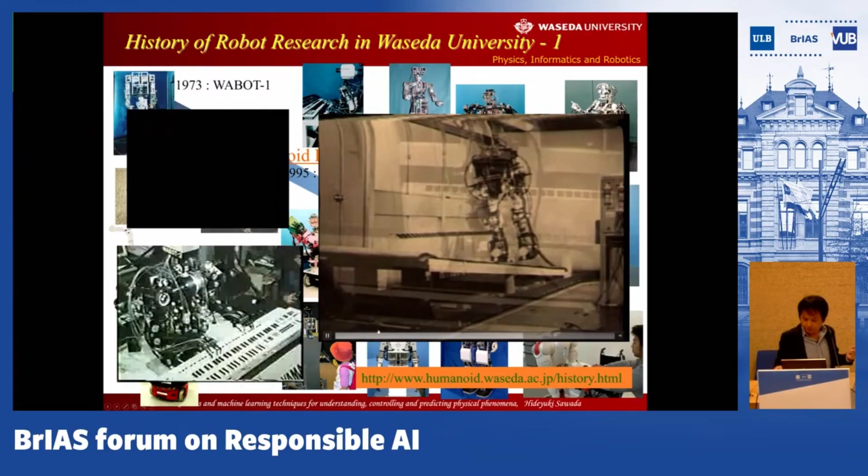Yes, this is the first robot, 50 years ago. The first robot we developed is a static walking robot. It means that in each small motion, the stability is calculated, so in any situation the robot was kept stable under control. But static walking is different from human walking, because we walk dynamically, right? We cannot stop in the middle of the motion, or we fall down. But the first robot was realized by static motion, one by one.

At that time, the robot took about 30 seconds for one step, because we needed calculation one by one. And the first robot used a hydraulic system, not electric motors. At that time, there was no such motor. The second one, developed 10 years after that, realized dynamic walking, like this one, a walking motion like a human, and it can also climb up steps and some slopes, more than 40 years ago.

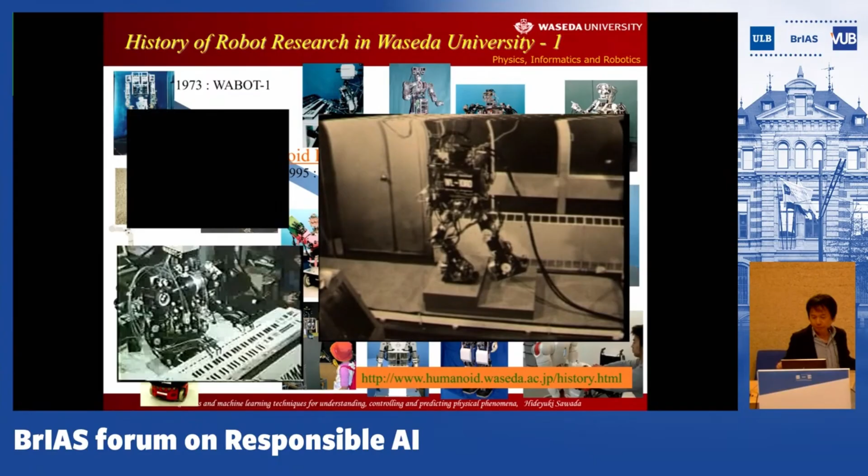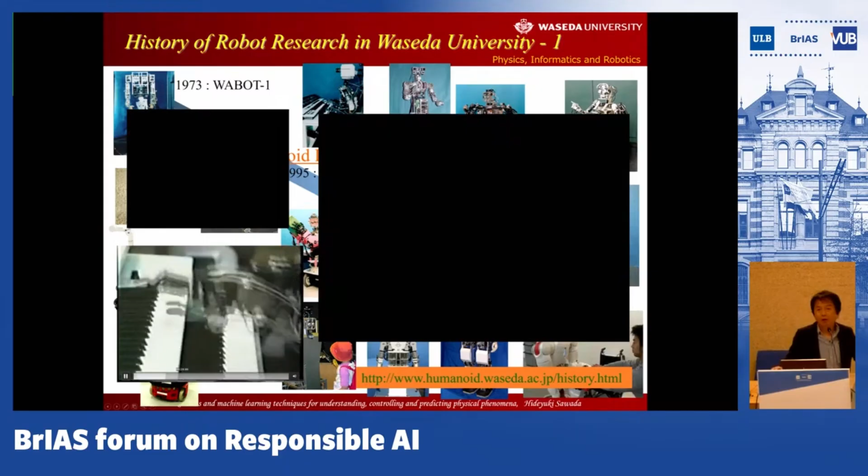After that, we developed a piano-playing robot using maybe 30 or more DC motors for the control of the fingers and the feet for playing keyboards. And in the Tsukuba Expo in 1985, this robot played together with a real orchestra, like this one. It was really a sensational work realized by a robot 40 years ago.

Yes, this is an old video, but this is the history. Then in 2000, we started another robotic research institute called Future Robotics Organization, and we have developed further robots, not only just to walk or move, but to handle objects or to collaborate and communicate, including touch with humans.

And this is a video of a robot developed about 10 years ago, around 2010, and it can dexterously manipulate small stuff. It is a chopstick... no, it is not a chopstick, but a straw. It can put it in a cup and give it to another person, right?

And also, this robot is able to break an egg, maybe this one, like this. Yes, dexterity. Like this, maybe like this, okay. By controlling the force given to the egg, the robot is able to softly grasp the egg, and also it gives some force to break it on a pan.

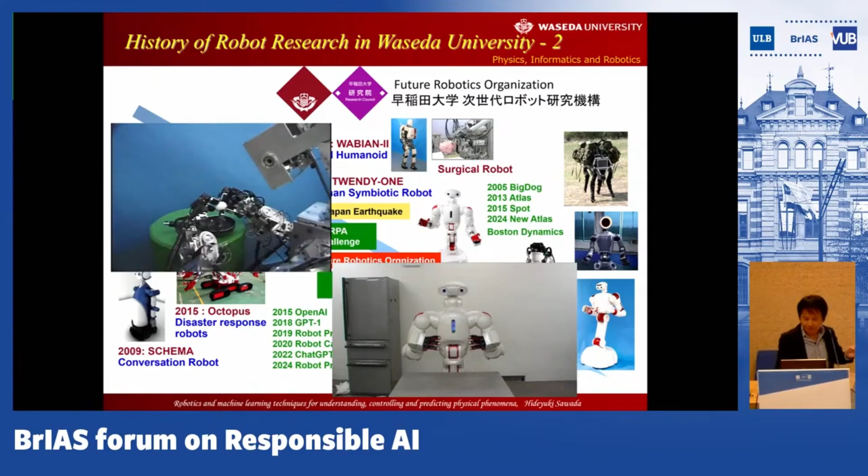Okay, right? And yes, the walking robot. As you know, these days there are a bunch of robots introduced by the U.S., of course Japan and also China. But as I introduced, the first biped robot was developed by Waseda University, and these days different kinds of robots are developed. But we, the Waseda group, do not work on biped robots anymore because

this is a typical structure of the biped robot. The biped robot is expressed by the physical control model of an inverted pendulum, right? All the motors are settled in the inverted pendulum; it is much more complex, but it can be modeled like this. By modeling all the motors and the geometrical structures of the robot, we can construct a control system. Once we get a control model, it is not difficult to control it.

The problem these days is the power of the motor to generate force. Have you ever thought of how much force is given when you walk? For example, for a 60 kilogram person, how much force is applied to the knee? Have you considered that? About 4 to 5 times your weight. This means that for a 60 kilogram person, when he walks, about 200 kilograms of force is applied to the knee or the foot.

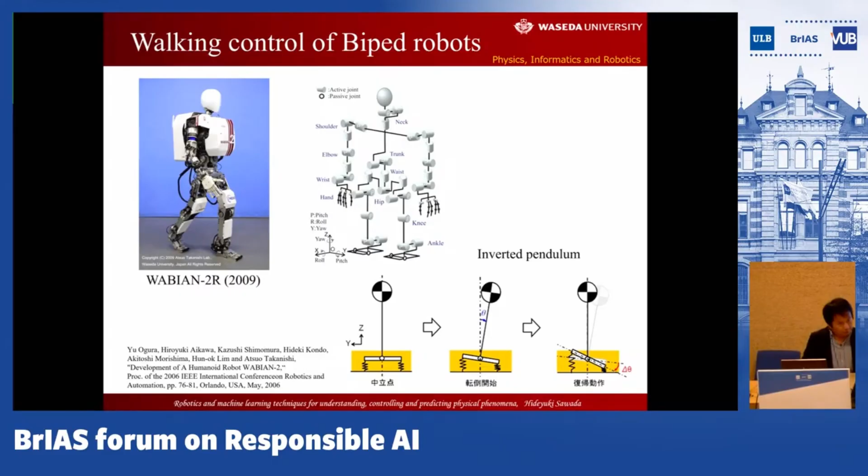Waseda University has been engaged in the development of such robots so far. And these days, we are much more interested in flexible robots able to have good communication with humans, for supporting or having real-time interaction with a human, like handing some object to a person, working together, or something more.

As you know, robots were first introduced for manufacturing in factories, in the secondary sector of industries. Then such robotic technologies were introduced to the primary sector, such as agricultural robots or agricultural worker supporting robots. And these days, such robots have been further developed in the tertiary sector as service robots to support or assist humans.

And this is another result introduced by graduates of Waseda University. It is a project called Gundam Global Challenge. Gundam is a very famous robot, first animated in Japan in the 1970s, almost 50 years ago, and all Japanese people know it. About 10 years ago, the animation company and some companies got together, including alumni of Waseda University, to develop a real-size Gundam robot.

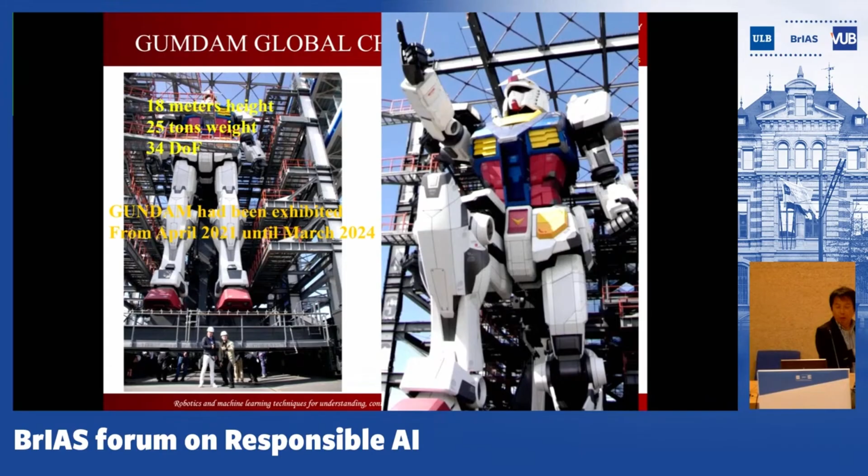Okay, here. And currently, this robot is exhibited, not moving, but in a still pose like this, in the Osaka Expo. So if you go there, you can see the real-size Gundam, 18 meters in height, but it won't move anymore. Yeah, like this. In a pavilion, they exhibit the Gundam.

Yes, and then in the pavilion they present a metaverse exhibition, so that you can observe the Gundam in 3D or something. Yeah, and outside they exhibit this Gundam. Okay. Yeah, currently until maybe September of this year, I don't know. Yes, maybe 3-4 months from April, this month. No, last month.

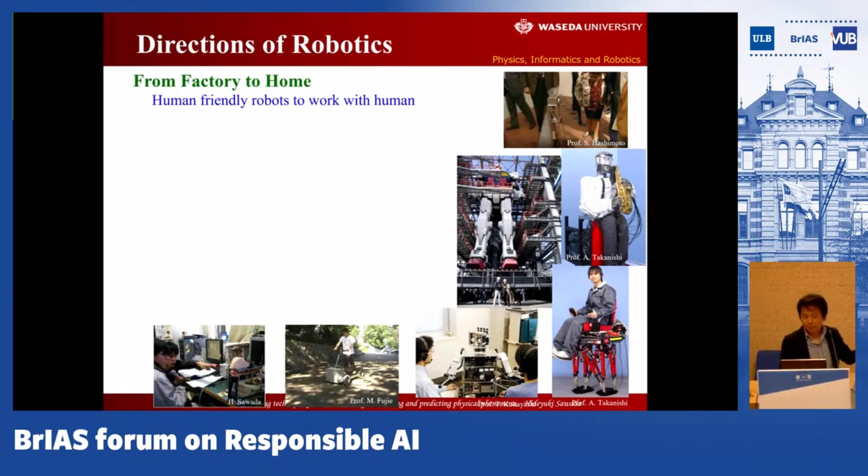Yeah. Okay, so far in Waseda University, different types of robots have been introduced. And we have realized that the robot in the factory can be sent out to homes for the open public, so that it can work with humans in a human living environment. And then such a robot cannot be specialized with great power or fast motion or something more.

They are not. They will not exist for fast production, mass production, or very precise motion or something more. Instead, the robot should behave like a human, because we humans do not move so precisely, so fast. But to work or to live with humans, the robot should be like a human, right?

And so to do so, one approach to be installed in robots is machine learning or AI, so that the robot is able to learn communication skills through learning with humans. And also the robot can learn the living environment like a human baby does, right?

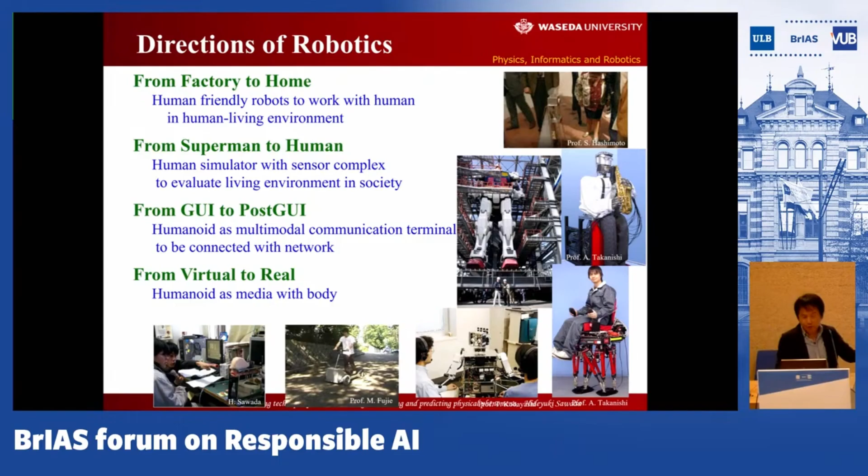Human babies are born without knowing anything. But by interacting with their caregivers, I mean the parents, they get to understand the living environment, the world, and also communication skills to handle their surroundings. So we expect robots to behave like humans, right? To do so, we are trying to install good AIs or machine learning techniques in robots.

Okay, AI, artificial intelligence, is defined like this. It is human-like intelligence realized by computers, and it was first introduced about 80 years ago as a neural model, and then artificial intelligence was first defined at the Dartmouth workshop in 1956. And then after the introduction of the perceptron, the ability of machine learning has greatly increased. Yes, and now we have pretty good machine learning techniques these days, such as deep learning and more.

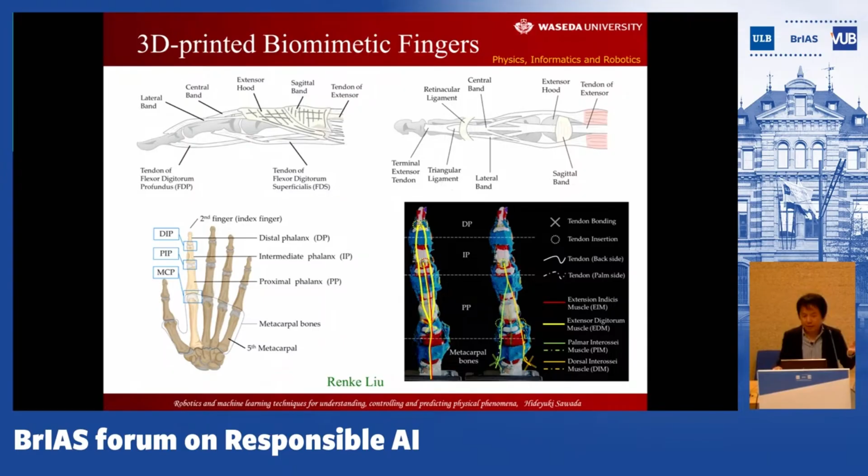One example is the 3D printed biomimetic fingers. We are printing each part of human-like fingers by referring to the 3D model of a real finger that consists of ligaments, bones, tendons, muscles, and so on. These days we can print different materials at once, so we print them to make a finger. Then this articulation with an artificial muscle moves like a human, very flexibly, like this.

What is the difference between rigid machines and soft machines? Once you make rigid machines with the geometry of the machine structure, we have rigid bars and rotating motors. Then, for example, the path can all be calculated mathematically, geometrically, with a rigid robot.

But in the case of the soft robot, for example our hand, our junction is not rigid. We can move very flexibly with one junction. This means that when we locate this hand here, the location of the elbow or shoulder can be differently defined or placed, like this.

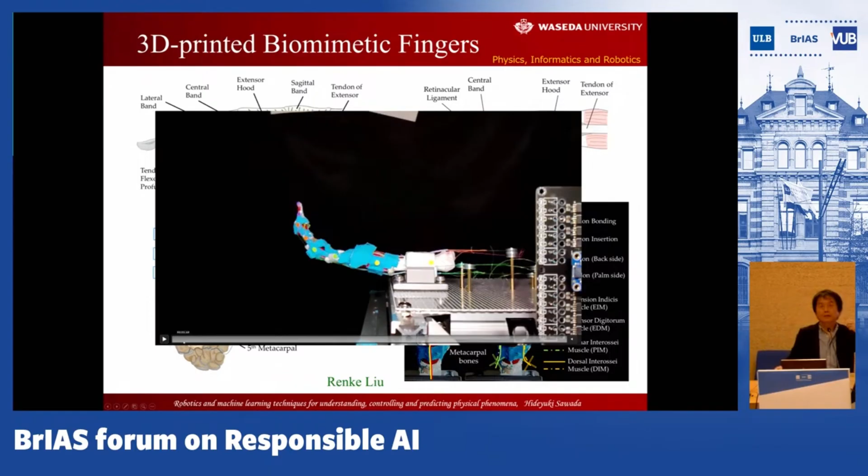In the case of the rigid robot, it won't happen. Every motion or moving path can be geometrically calculated. But in the case of the soft robot, it is not like that. So the idea for controlling soft tissues is to use machine learning, right? Then the motion of the finger is realized by artificial muscle, but the control is made by machine learning.

Okay. And also we have different topics like tactile displays or waterborne actuators to move in water. Many of them we have in my laboratory. I have different topics, like this one, which replicates the motion of the insect.

Insect, this one. Yes, and also we are developing a fish robot. This is a robot, but it is made of a very soft fin, and it swims like that. And also we are working with an inchworm robot to flexibly move, to walk like this. And I briefly introduce some of the control of such robots.

Okay, the first one is a talking robot that speaks like a human. Mostly you can listen to a human-like voice from your mobile phones or TVs or something. But all of such voices are made by software methods using computer algorithms. But what we are trying to do is to reproduce it all mechanically, like a human vocal system.

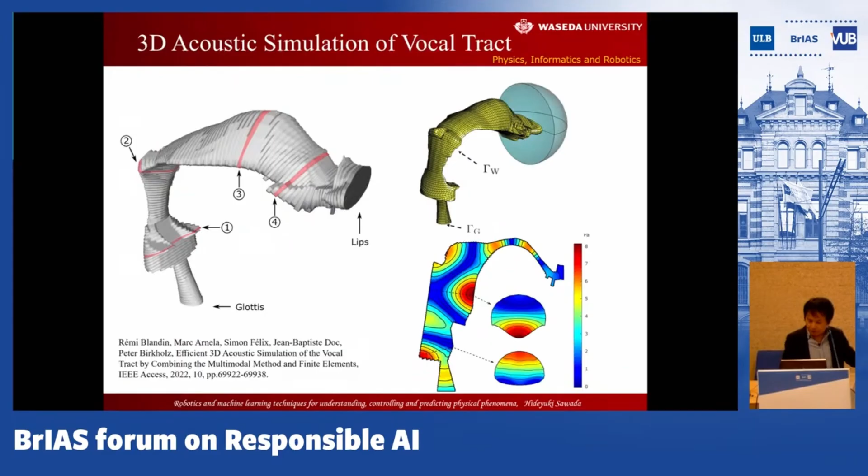And also we refer to the physical simulation. Okay, this is a robot. Our robot consists of a lung with an air tank, the vocal cords to make a vibratory sound, a resonance tube as a mouth, the tongue inside, and the nasal cavity, so that the air is led to the mouth tube and the nasal cavity to make resonance characteristics. Then the generated voice is listened to by a microphone. This is not for singing, but for comparison with the real human voice.

Then what we do is let the robot listen to its voice and also a real human voice for reference, and make an autonomous control of the motion inside the mouth to make a sound close to a real human voice. It refers to the procedure by which the human baby learns its voice. Human babies learn clear vocalization by training with their caregivers or parents. Firstly, the babies only cry, but gradually they learn how to make sounds.

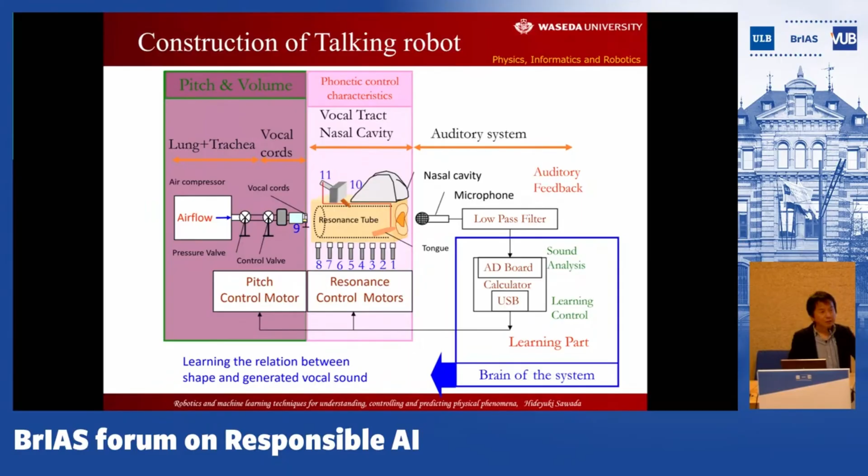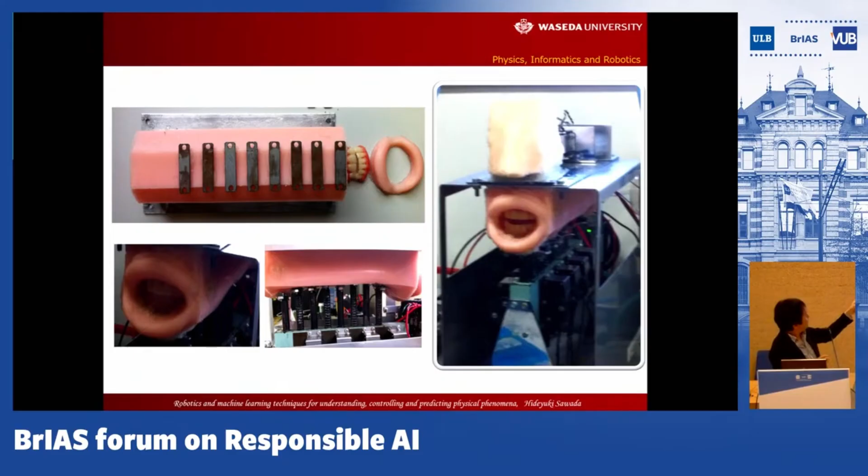But the babies cannot see inside the mouth. For the articulation, the baby has to move the inner mouth. They do not observe the inner mouth shape, but only listen, then try to make close sounds by adaptively moving their mouth, right? This is what this robot is doing. Everything is made all mechanically. We use a silicone rubber mouth and tongue, the teeth, and the nasal cavity with plaster. And then the motors are set underneath this tube.

The size is the same as the human vocal tract, with a length of 18 centimeters, because if you have a different length or diameter of the mouth, the resonance characteristics would be different from the real human. So we made it the same or close to a real human, with a length of 18 centimeters and a diameter of 3.5 centimeters or something. Then, as you see, this robot is able to make different resonance characteristics by randomly moving the vocal tract, right? And this is the vocal cords, to make a vibration with the air.

Then for the learning, we use a self-organizing neural network, so that the input vector is given by the acoustic features of the vocal sound, and the output is set as the articulation of the motors. So this network learns how to control the motors to be associated with the input vocal features. Then the learning has been conducted, and as a result, the robot successfully learns to vocalize. Like this, maybe.

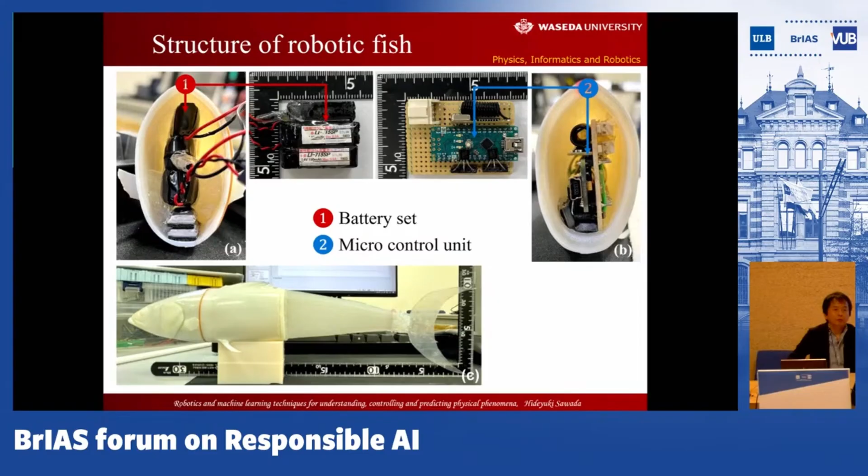Okay, the next topic is, briefly, the robotic fish. We have developed a very soft robotic fish with a soft fin like this. But the problem is that the soft fin is not controllable, especially in water. It swings with different frequencies of the soft actuators, and the relation between the control command and the swimming performance is pretty uncertain. So what we tried to do is to associate the control parameters with the generated swimming behavior by using a neural network. Then it was successful.

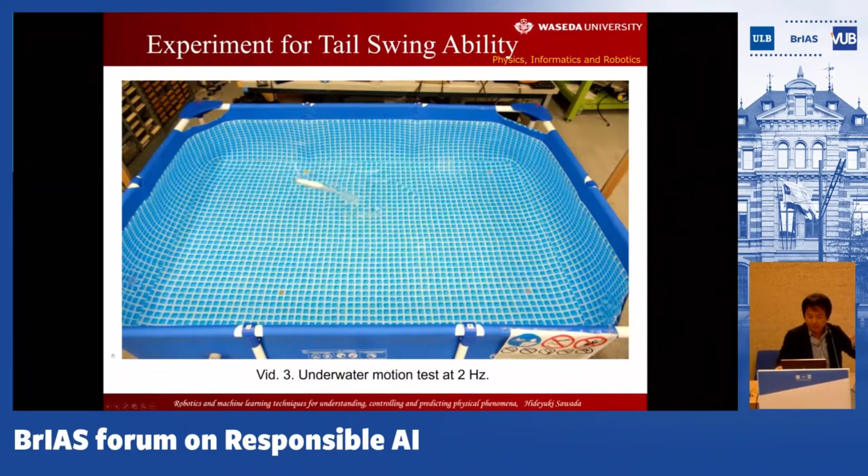Yes, the fish robot. It is an untethered one. Everything is packed into this robot and it moves. It swings like this with a 2 Hertz flipping motion. And also, let's see another one. Maybe this one, the slow flipping motion, like this, a very slow one, the 1 Hertz flipping motion, and faster. Yes, 2 Hertz flipping motion.

This fish robot is able to swim with different flipping motions, and it can turn right and it can turn left at any time by using the learned control parameters with the flipping motion. Like this. The robot is pretty real, right?

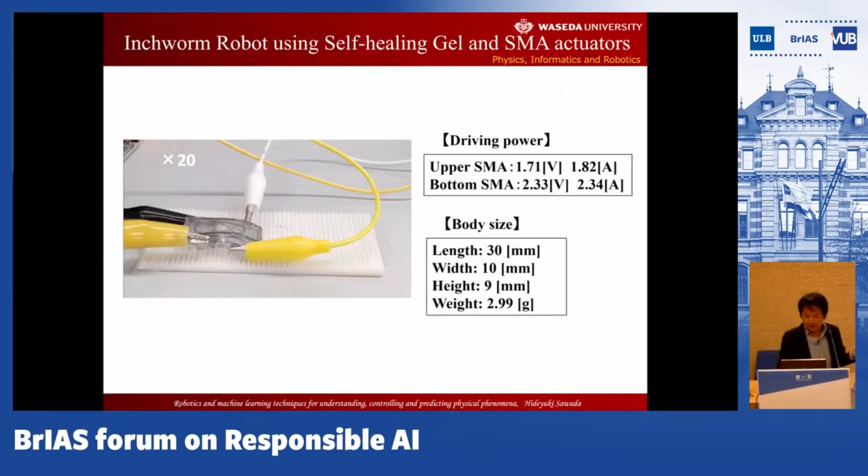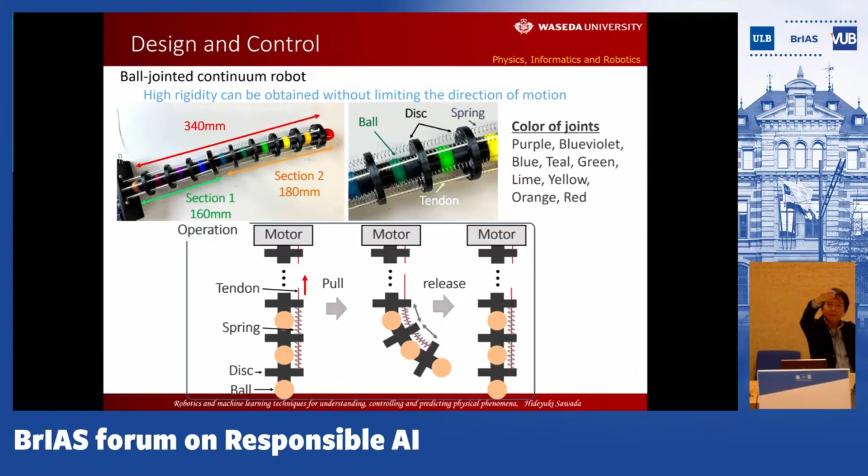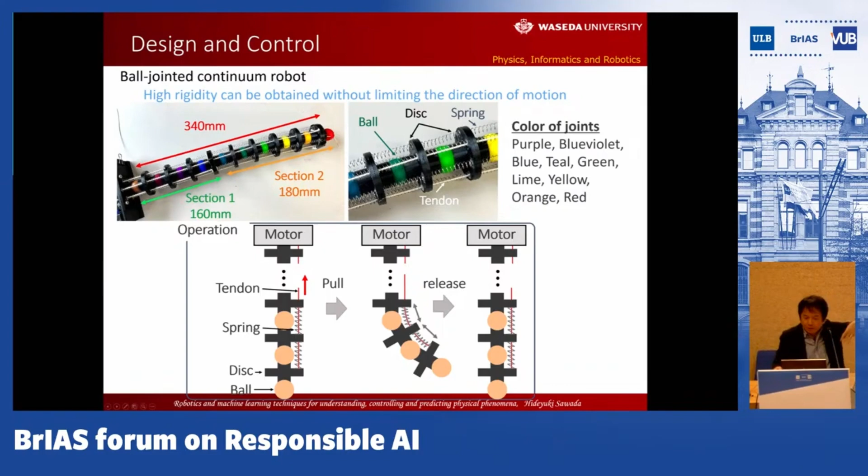And also, maybe this is the first one: a continuum robot for flexible object grasping. We are also developing a long, tail-like robot for grasping objects, like this. We construct this flexible robot with a ball joint, springs and pulling actuators. Yes, it can move like this. It moves by pulling the tendons.

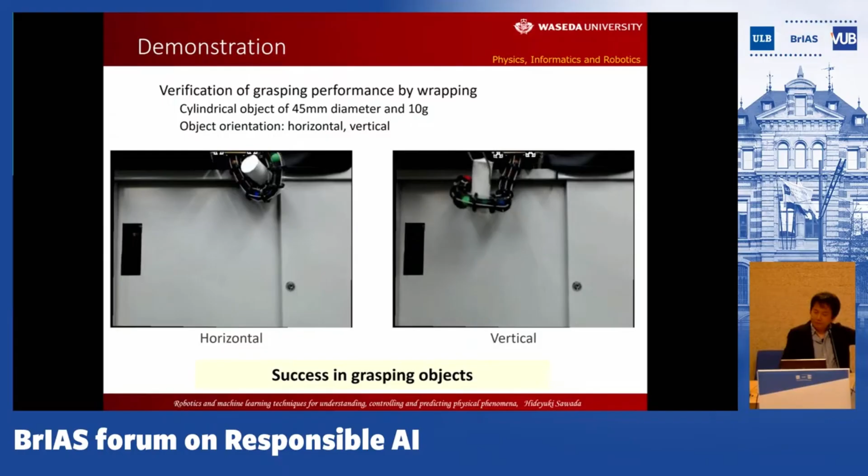But the problem is that when we want to put the tip of the robot in some location, there are different possible shapes of the robot. Right. So we also apply a neural network for the learning of this flexible motion. Then it is able to grasp like this, with different styles of grasping, all learned by machine learning.

I have some other examples, but it's time. The conclusion is that I have introduced some mechanical or soft systems to grow up or to learn like human behavior.